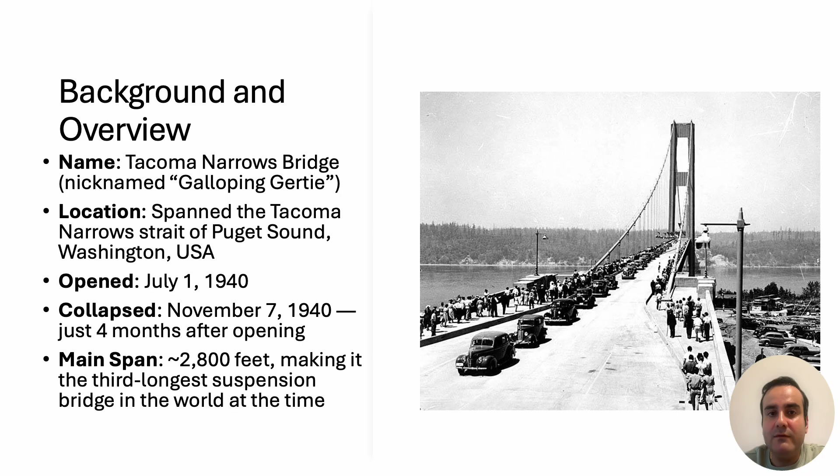The bridge was designed by Leon Moisseiff as a very slender suspension bridge. It had a deck width of only 39 feet and an unusually low depth-to-span ratio of 1 to 350. To save money, stiffening trusses were kept to a minimum, which made the structure more flexible. The focus was on elegance and economy, but this came at the cost of stability.

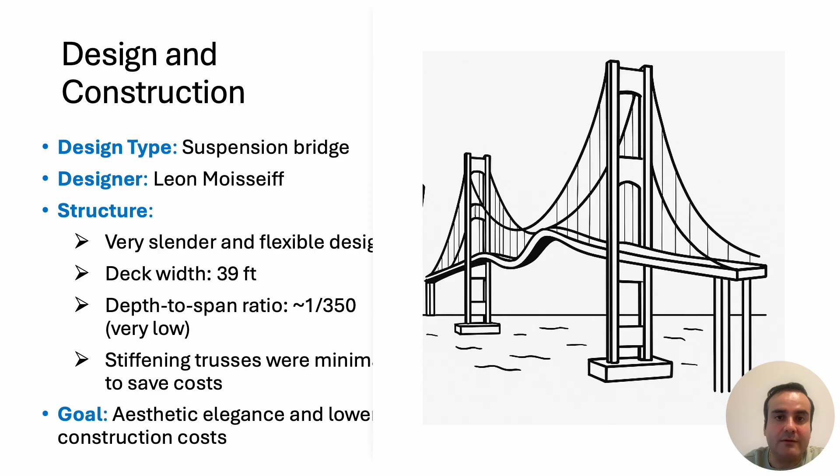Even before the collapse, problems were evident. The bridge was notorious for its vertical oscillations, so much so that motorists said it felt like riding a roller coaster. Engineers attempted fixes with tie-down cables and hydraulic dampers, but nothing worked. Because of its constant rhythmic motion, locals gave it the nickname Galloping Gertie.

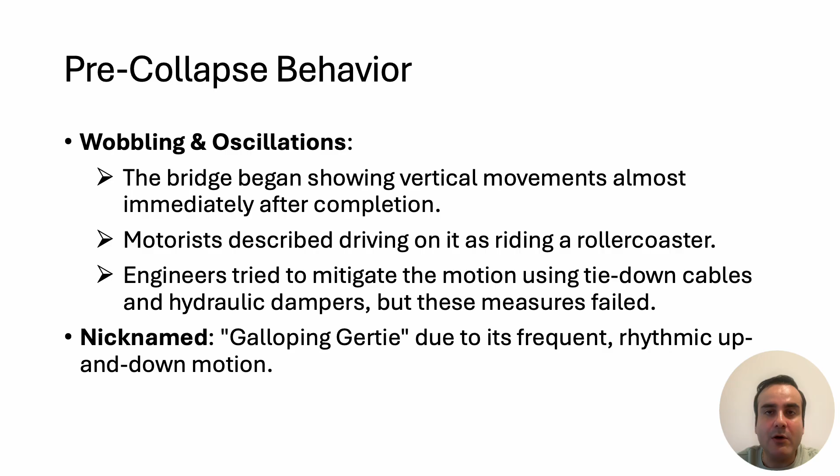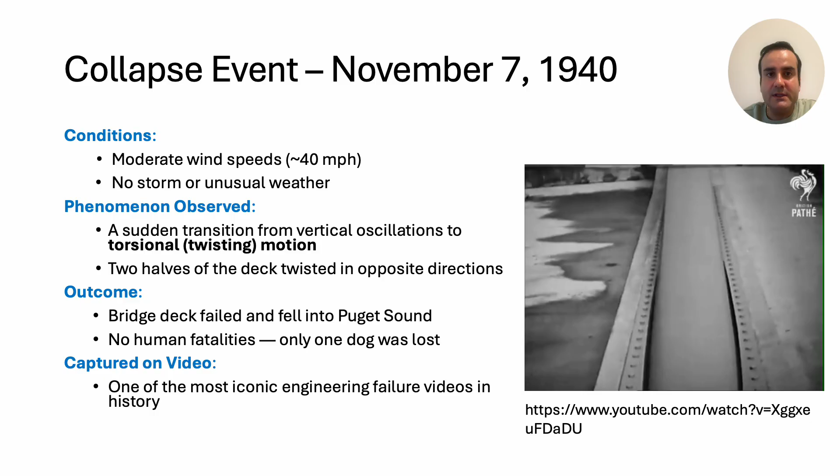On the morning of November 7, winds of around 40 miles per hour swept across the bridge. This wasn't an extreme storm, just moderate wind conditions. But suddenly, the oscillations changed from vertical bouncing to violent twisting, with the two halves of the deck rotating in opposite directions.

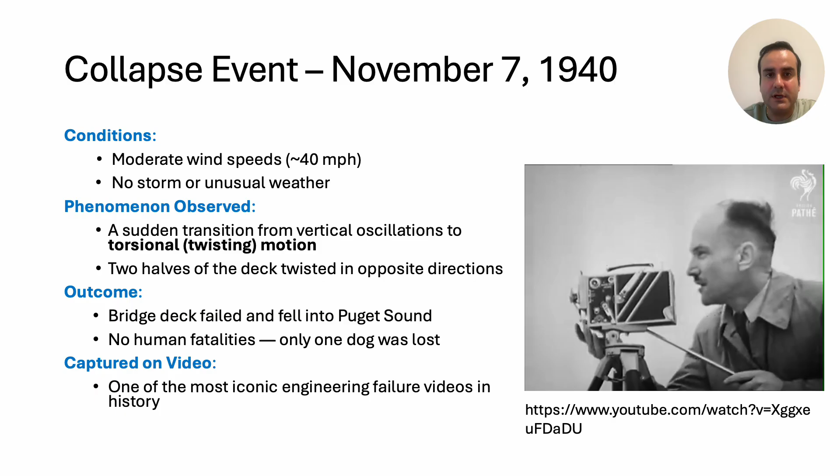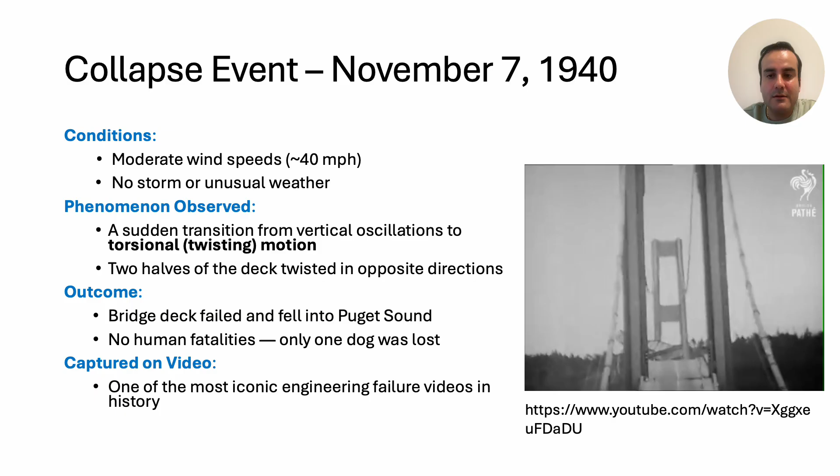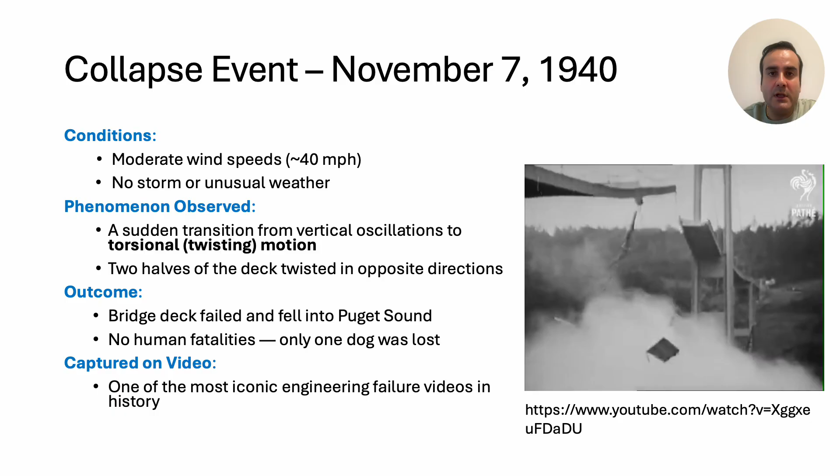The bridge deck finally tore apart and collapsed into Puget Sound. Thankfully, no human lives were lost, though one dog perished. The entire collapse was captured on film, and it remains one of the most iconic engineering failure videos of all time.

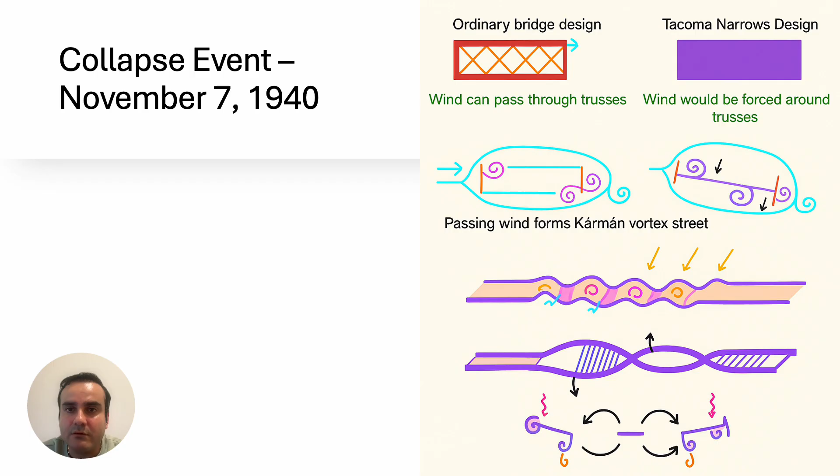At first, the deck oscillated in gentle wave-like motion, but as the wind energy matched the bridge's natural frequency, the oscillations quickly grew stronger in a process called aeroelastic flutter. The motion then shifted from simple vertical movement to violent twisting, or torsional galloping, as shown in the lower diagrams. The twisting stressed the suspension cables, and as the flutter intensified, several cables snapped. Eventually, the oscillations became uncontrollable, and within minutes, the central span of the bridge tore apart and collapsed into Puget Sound.

So, what actually caused the failure? It wasn't classic resonance, as often misunderstood. The real cause was aeroelastic flutter, a self-exciting vibration where the wind itself feeds energy into the structure. The torsional mode of the bridge was triggered, and because the design lacked adequate aerodynamic stability and torsional damping, the twisting amplified until failure. Contributing factors included an underestimation of aerodynamics in long-span bridges, overconfidence in simplified calculations, and inadequate wind effect testing.

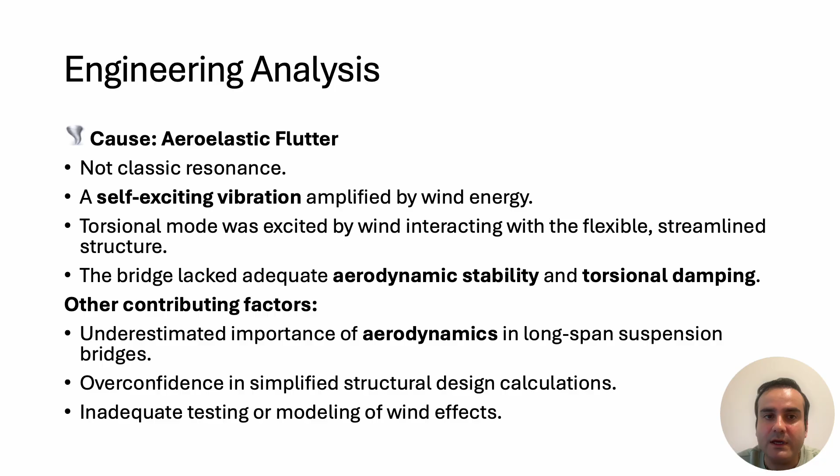The Tacoma Narrows collapse completely changed engineering practice. First, wind tunnel testing became essential for long-span bridges. Engineers also recognized that torsional stability must be carefully analyzed. Collaboration between structural engineering and aerodynamics became critical. Finally, it underscored the importance of engineering ethics, the responsibility to design not only for strength but for safety under dynamic conditions. In short, this was the birth of modern bridge aerodynamics.

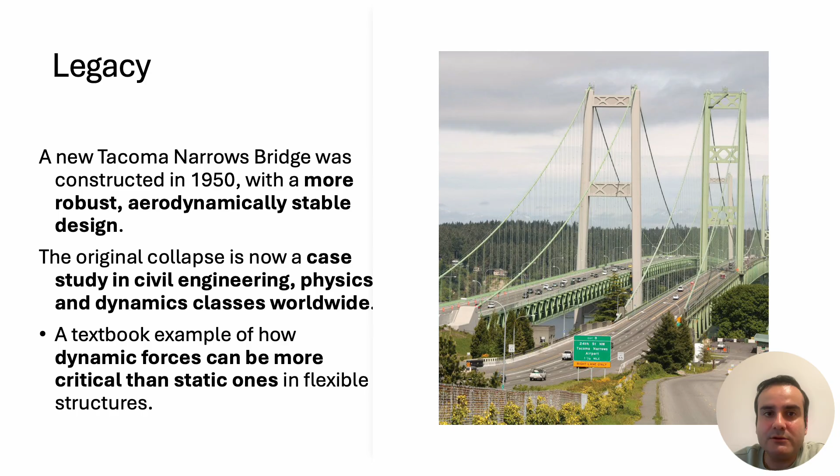A replacement Tacoma Narrows Bridge opened in 1950, built with a much more robust and aerodynamically stable design. Today, the original collapse is a standard case study in civil engineering and physics courses around the world. It stands as a powerful reminder that dynamic forces can be more dangerous than static loads in slender, flexible structures.

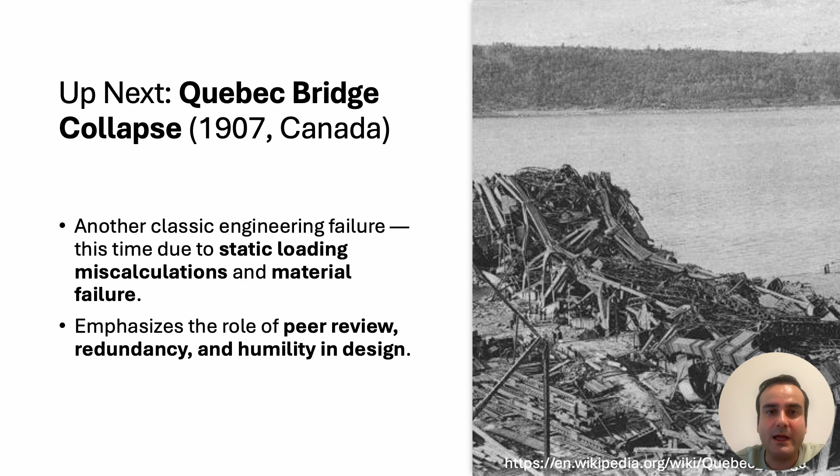In the next case study, we will turn to the Quebec Bridge collapse of 1907 in Canada. Unlike the Tacoma Narrows, this failure wasn't due to aerodynamics but to static loading miscalculations and material failure. It highlights the importance of peer review, redundancy, and humility in design. Another key turning point in the history of structural engineering.